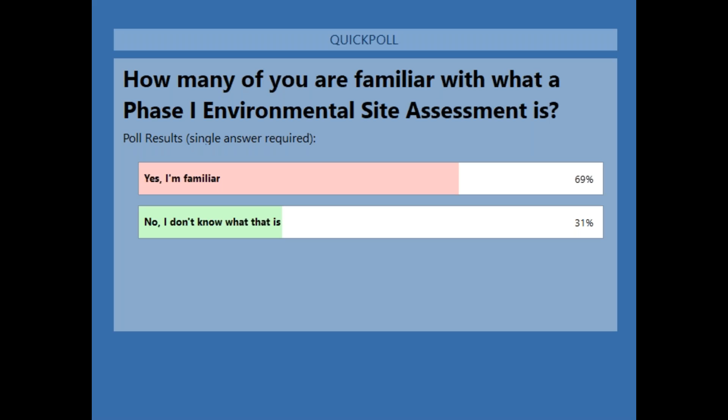All right, and now I'll turn it over to Justin. Thanks, Katie. Glad to be virtually here with everyone this morning. I'm getting a little tired of saying that word.

Before we get into this topic, I'm going to try to lend some perspective. I know 30% of you don't know what a phase one is, so maybe this will be helpful. We as scientists and engineers are typically uncomfortable in the abstract world. We like certainty, we like fundamentals, and in most cases, we like to understand the rules and regulations that govern the field that we work in. So the environmental field really is no different. It's in fact littered with tons of federal, state, and even local law. And these laws can change, with updates and new toxicological information or even scientific practice.

So as it pertains to development projects and property transactions, navigating the environmental field is a necessary step to ensure risk transparency. And with the understanding that many of you may not be directly involved with these types of environmental projects, Greg and I have tried our best to keep this presentation as engaging as possible. Questions are definitely welcome. Hopefully we'll have enough time to address them after each of the three sections that we've separated this presentation into. So please submit questions to Katie as she suggested via the webinar interface as we go along.

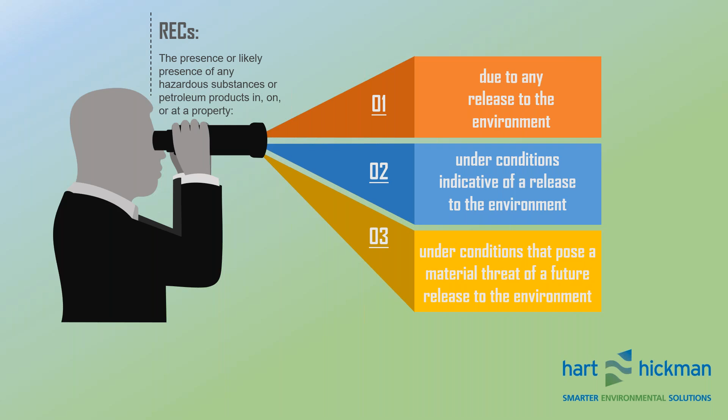And so some general rules for government records include that the records must be reasonably ascertainable, and the commercial services can be approved also as sources of government records, as long as the information is current, within, I think it's 90 days of the release date.

The physical setting records review is typically a review of like a USGS topographic map or an equivalent map to get gradient information for the site. Is contamination from an up gradient property coming on to your property, or are you spreading contamination to a property that's down gradient of you? Other information may also be required if that contaminant migration is likely or customarily included by local practice. So there's some local laws that sometimes come into effect here, not just state, not just federal.

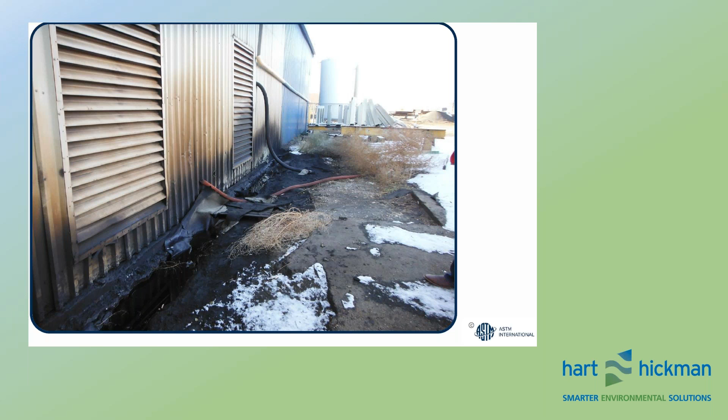But to tie at least the phase 1 environmental site assessment portion up, phase 1 ESA is conducted to identify liabilities associated with potential or existing environmental contamination. Remember, you're evaluating whether you have recognized environmental conditions, as defined by the ASTM standard. So not only can contamination impact property value, but having visibility on this issue also allows for potential landowner defense once that entity takes title of the property.

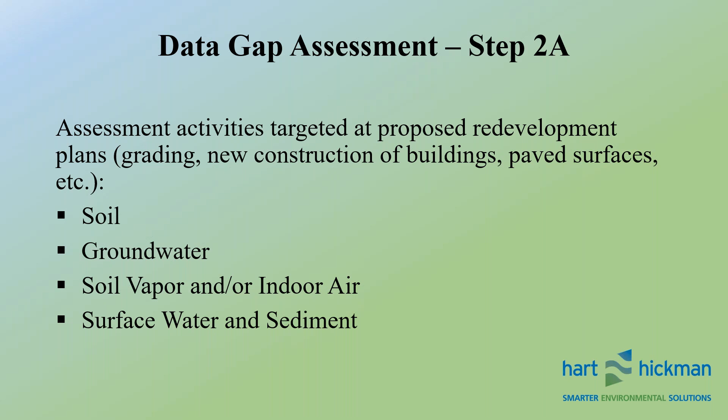So to round out that second step, you also need to prepare an environmental management plan. This is more or less a construction document that can be used by your general contractor or your grading contractor that describes what you can and can't do with the dirt or groundwater. You could also evaluate whether vapor intrusion is a concern, which is what Greg's going to get into for this last part of the presentation. That would entail preparing a vapor intrusion mitigation system plan. That might mean the new building that you want to build has to have some kind of engineering controls constructed within it to make sure that the site is safe.

And then lastly, this final grade sampling has to occur. Once you've moved all the dirt, you've installed your hardscapes, your softscapes, you go out and collect another round of samples to make sure that you haven't brought any contaminated dirt to the surface, and so now it's just sitting there unbeknownst to anyone.

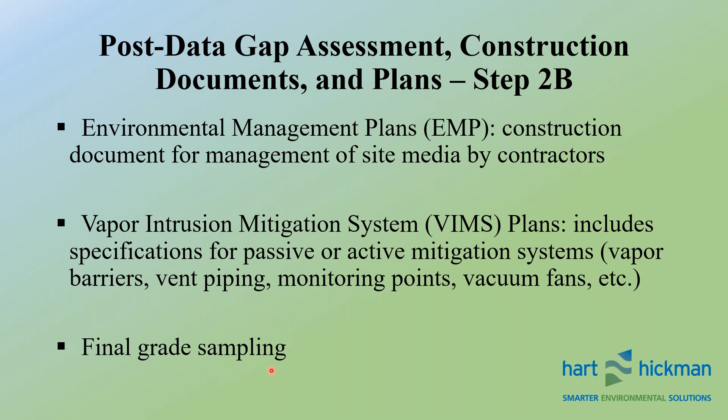Step 3 is the state provides you with a draft agreement so that you can review the language, specifically the land use controls that they might want to put on your property. And so this really is more or less a negotiation. Some of these land use controls the state might not budge on, but others I've seen that they could possibly have some flexibility on.

And then finally, step 4, to get a Brownfields agreement, you've got to go through this public comment process where people, specifically those that might be landowners in the vicinity of the Brownfields property, get a chance to comment, which doesn't actually often occur. And then once that public comment period, that 30-day process ends, then you can actually file the Brownfields agreement.

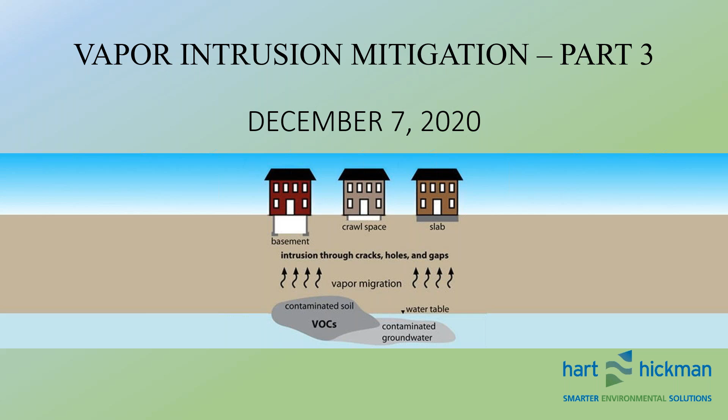You can mitigate all types of buildings from residential, commercial, mixed use, industrial. Each has their own nuances and challenges. You can also mitigate existing buildings or install mitigation measures during construction. For the purposes of this presentation, I'm going to focus on new construction, but I'll touch briefly on existing buildings as well.

Existing buildings present some additional challenges. Obviously, you don't have the luxury of installing a sub-base gravel layer with vent piping below the slab. So what you typically do is perform a pilot or influence test prior to design to determine the radius of influence and vacuum requirements to mitigate the area. This involves coring holes in the slab, applying a vacuum at that point at various vacuum levels, and then measuring subslab vacuum at various distances from that suction point.

And you can have high variability in subslab conditions within existing buildings, as well as variability in radius of influence even within the same building. I've seen greater than 40-foot radius of influence in one area and then next to nothing in another area of the same building. So you need to investigate what the building subgrade features are, whether the slab was poured directly on a clay layer or if there is a gravel layer. What are the foundation features? Are there footers or pits that could cut off flow? Are there preferential pathways such as cracks or utilities that could lead to short circuiting when you're applying a vacuum?

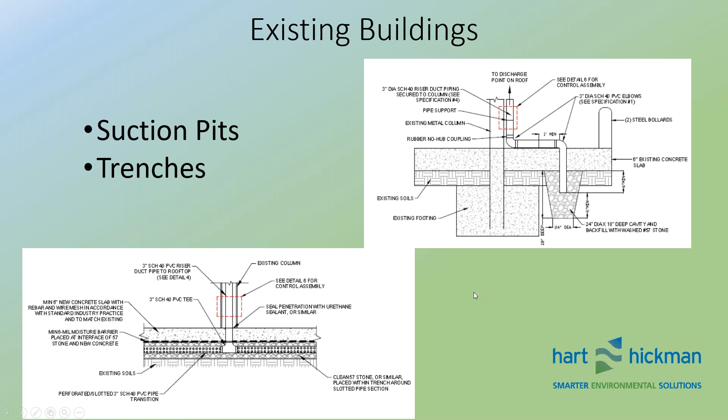So some of the components of a vapor intrusion mitigation system are the subslab gravel layer and a vent piping network within that layer to allow vapors to travel. A vapor barrier below the slab to prevent vapors from intruding into the building. Riser piping coming out of the slab connected to your subslab vent network to exhaust vapors to the roof. Monitoring points throughout the building footprint to measure vacuum to confirm you're able to achieve influence across the building, as well as collecting subslab soil gas samples following installation. And then finally, connected to the risers at the roof, you need a fan to create a preferential pressure differential to draw vapors out, and those can be active or passive.

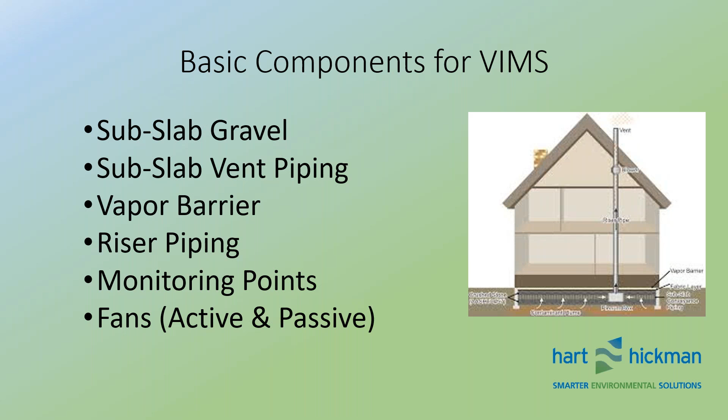So the first components are the subslab gravel layer and vent piping. The gravel should be washed clean gravel with no fines, so there's no restriction in flow. Typically it's 57 stone or pea gravel. And then for the vent piping, often it's PVC piping, slotted or perforated in areas where you want to mitigate, and then solid in areas where you're going through foundation features. And you've got to make sure the piping size is appropriate so you're not restricting flow.

There's also other vent options, low profile vent systems. The top left photo is GeoVent by CETCO. Land Science makes another similar product, but it's a low profile egg crate structure with similar characteristics to 4-inch pipe. So it allows you to apply a less thick gravel layer, but the manufacturer may require that you use their spray applied barrier with certified installers. So there could be some costs with that as well.

And then the bottom photo is a Cupolex system. It offers great preferential flow because it's open underneath the floor slab to provide a pathway for vapors, but it also can be expensive and unfamiliar to builders. PVC and gravel are typically installed by the plumbers and concrete contractors already on site, so there's no additional contractors needed, and they're familiar with those materials.

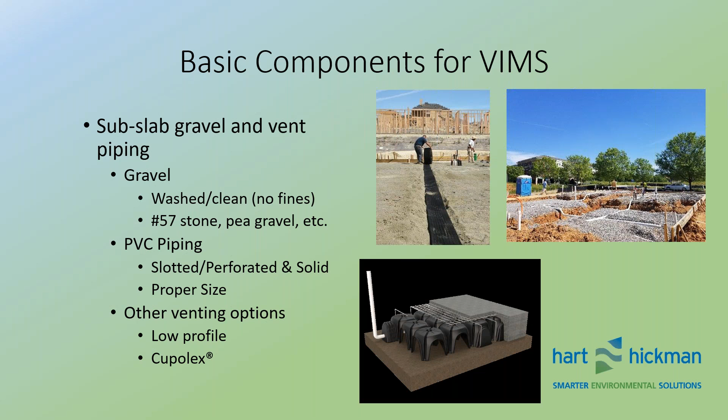For your vapor barrier, you can use taped sheeting barriers, or there's also spray applied barriers. All are rated for volatile organic compounds. The tape barriers are installed typically by your concrete contractor that's familiar with installing those barriers. And then the spray applied barriers are typically installed by specialty contractors that need to be certified by the manufacturer. So you have a new contractor coming on site just for the barrier. It can be easier and get a better seal when you are using spray applied barriers, but we've also had success with tape barriers in achieving the necessary specifications.

It's important to seal around the penetrations, make sure that there's no ability for vapors to come through the barrier. Oftentimes, we'll smoke test the barrier to identify any penetrations in the barrier that may need to be sealed. There's a video just showing kind of what the smoke testing looks like.

Obviously, they have some work to do there. And there's also hybrid barriers where there's a tape barrier or a sheeting barrier, but all the seams are spray applied, so it's kind of a hybrid approach.

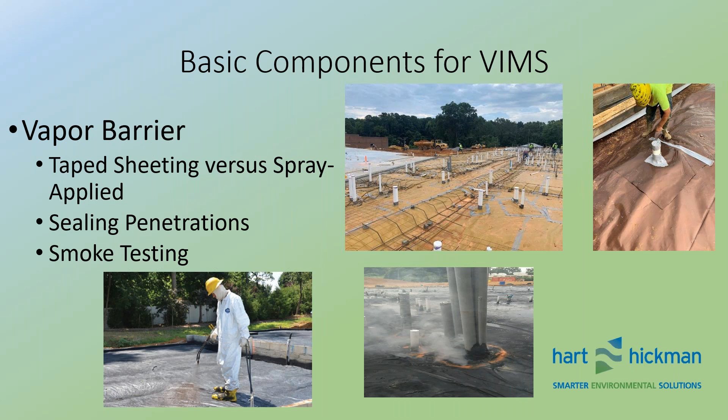Next would be the riser piping. So the spacing and locations are important so that they're out of the way, but also in positions able to mitigate the entire building footprint. Developers typically want these hidden within the walls, so we need to work with the architect to make sure that they're in okay locations. Risers need to be appropriately pitched, so you're preventing condensation water from clogging the lines, and so they drain to the slotted sections of the subslab piping.

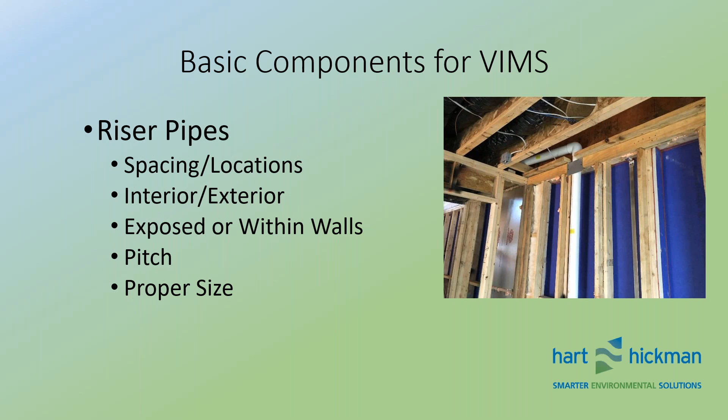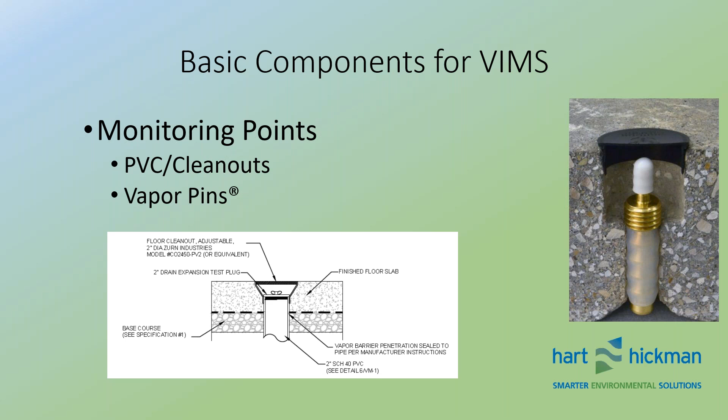And again, appropriately sized depending on the piping length and the area to be influenced. So taller buildings may require larger diameter piping. Monitoring points, these can be just PVC, connecting the gravel layer just below the slab with a plug and a clean out, or vapor pins, which you see on the photo on the right, which is sealed in the concrete, so that you can collect vacuum measurements throughout the building footprint, but also collect subslab soil gas samples.

High flow, low vacuum fans tend to be adequate with a permeable subbase, like a gravel layer. For existing buildings where higher vacuum is needed, you may need an industrial blower setup, or there's also now inline fans that can pull up to 25 inches of water column that can operate on a DC current that's converted at the fan, which is a new fan type that seems to be promising.

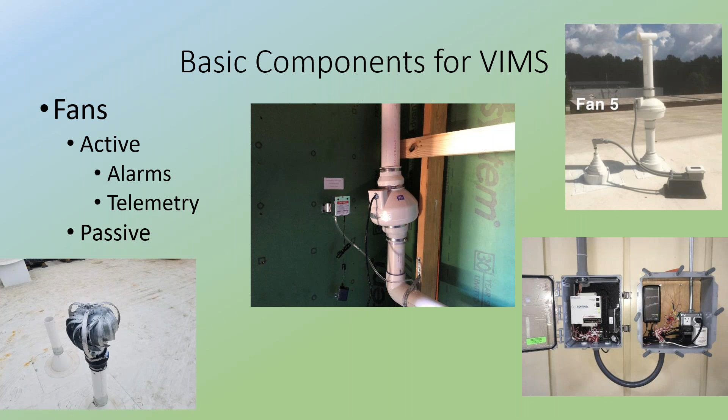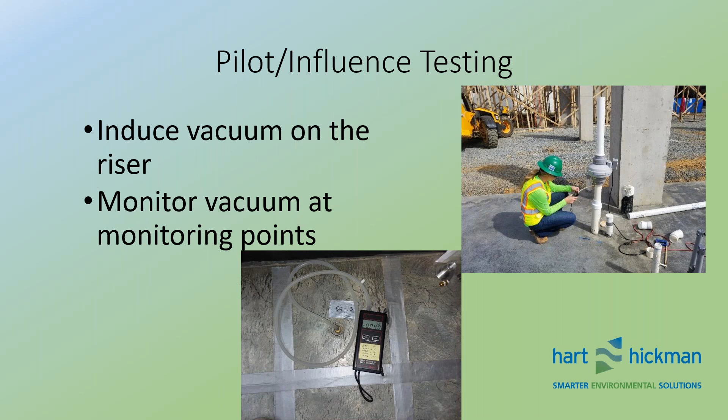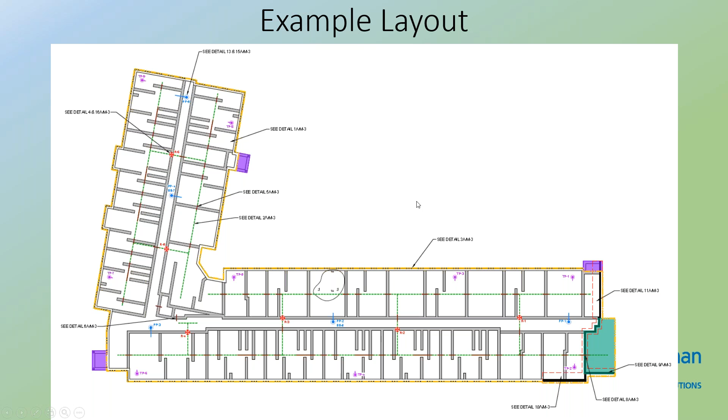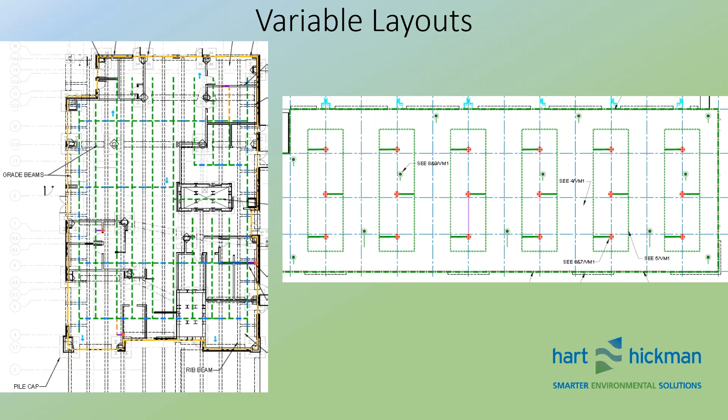And then on the photo on the right is just an open warehouse building with monolithic slab, no foundation features that limit flow. So you're able to space the risers out much further than you would in this scenario on the left. I think the spacing here was about a riser per 7,500 square feet, where on the left it was 2,000 square feet. So just something to consider. Obviously, the sub-slab foundations affect how your vent network's laid out. And throughout the whole process, you need to perform inspections and testing.

You need to inspect the gravel thickness, the piping's in the correct locations, it's slotted where it needs to be, it's solid where it needs to be, monitoring points are present, and riser pipes are in the correct locations and appropriately pitched to drain properly. Need to inspect the barrier to make sure it's sealed around penetrations into the footers. And then each step needs to be signed off that it was constructed per the design, and then a sealed installation report is submitted to the Brownfields program.

Communication is critical throughout this process so that we're notified when we need to do these inspections. Oftentimes we'll get notification the day before there are concrete trucks coming on site that we need to get out there and inspect the barrier. So the better the communication, the more heads up we have to get everything inspected appropriately.

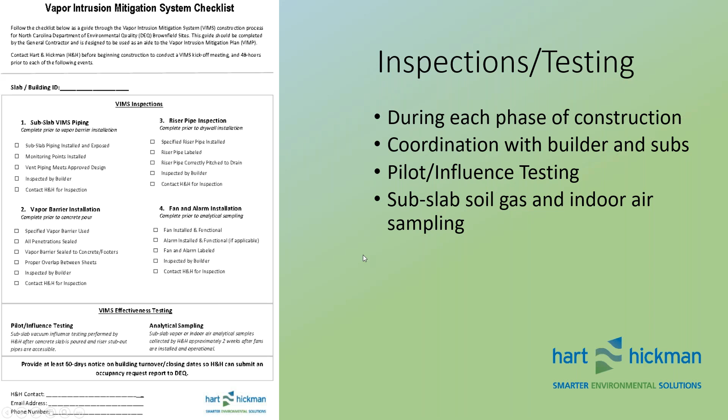Some of the key points: early coordination with architects and structural engineers is important so that you can understand where utilities are, where the risers can be located, what foundation features will be present, and how to tie those into the barrier. Based on sub-slab concentrations, you need to tailor your system to site-specific conditions. So if sub-slab concentrations are lower, a tape barrier could be adequate. If it's highly contaminated, you may want to go with a more robust spray applied barrier. You don't need to install the Cadillac of systems at all sites if the conditions don't warrant it.